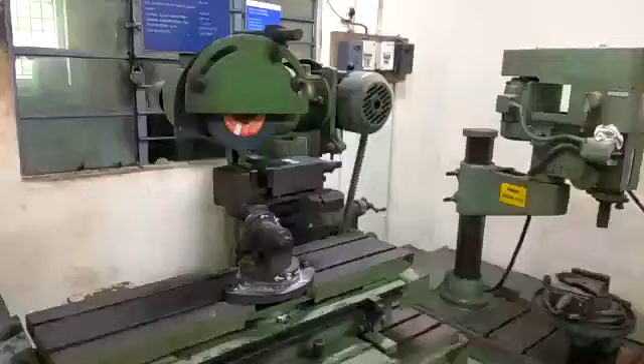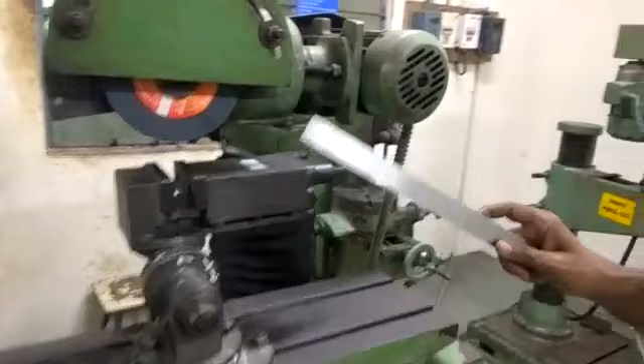Today's experiment will be on the single point cutting tool. The machine used for this is called a tool and cutter grinding machine.

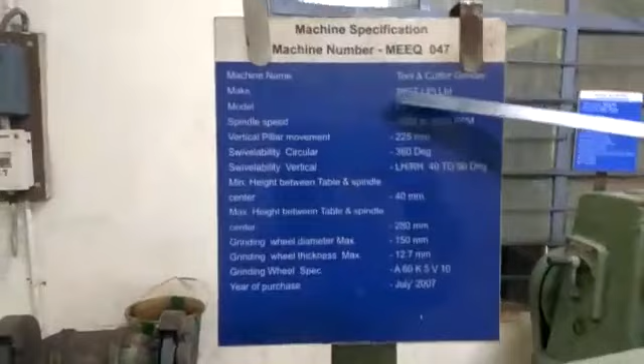See the grinding wheel machine specification. Machine name is tool and cutter grinding machine, made by SIGT Private Limited, model SG3. The grinding wheel spindle speed will be 3500 to 7000 rpm.

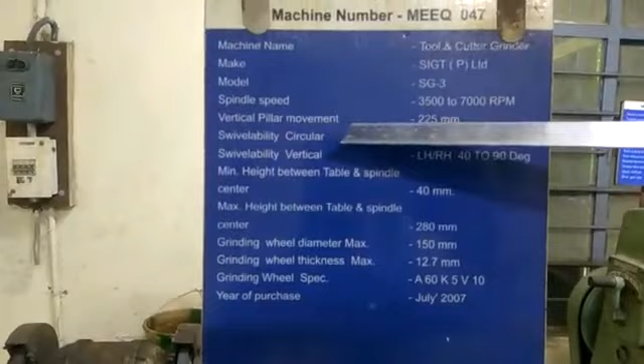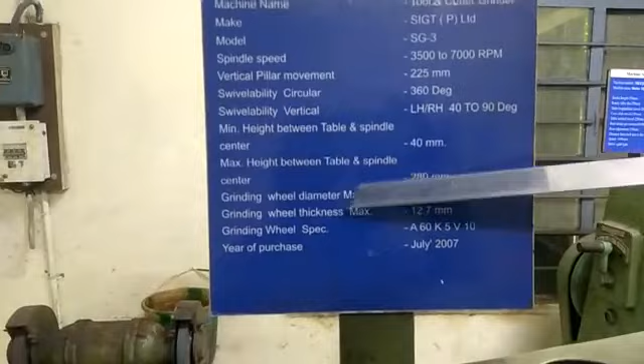Vertical pillar movement 225 mm. Swivelability circular 360 degrees. Swivelability vertical left and right end 40 to 90 degrees. Minimum height between table and spindle center 40 mm to 280 mm. Grinding wheel diameter maximum 150 mm.

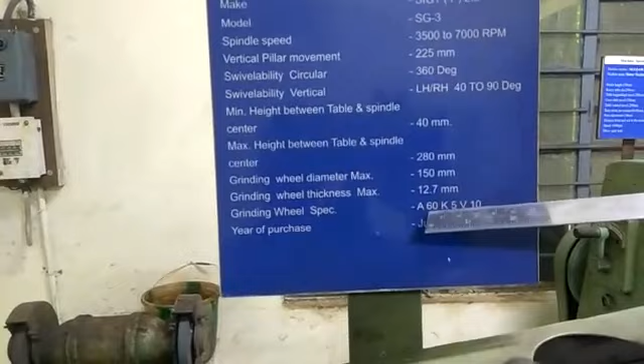Grinding wheel thickness 12.7. Grinding wheel specification A60 K5 V10: A for aluminum oxide, 60 for grain size, K for medium grade, 5 for dense structure, V for vitrified bond, 10 for manufacturing code number.

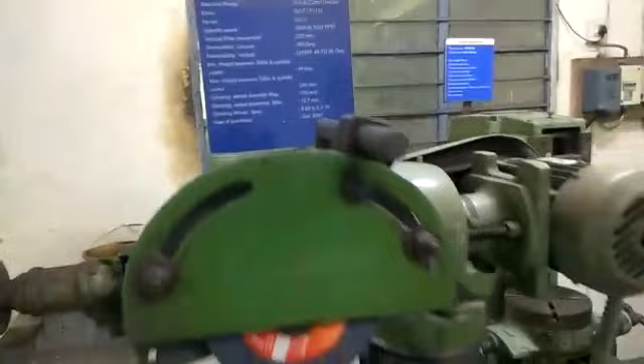Next are the parts of the tool and cutter grinding machine. This is a bed. This is a universal vise. This is the longitudinal movement. This is the crosswise movement. This is the grinding wheel.

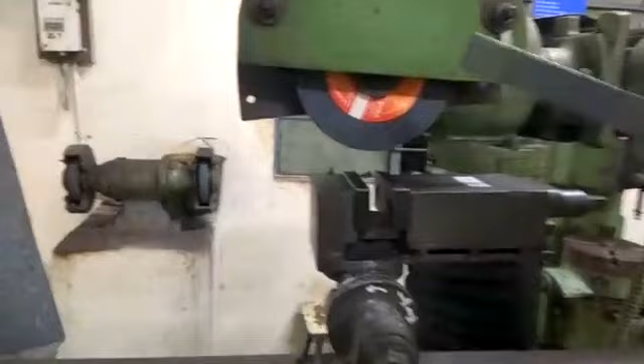The grinding material will be aluminum oxide. This is the wheel head. The wheel head will be tilting 360 degrees, left hand side and right hand side 40 to 90 degrees. This is the grinding wheel up and down movement.

This is where the depth of cut will be given. One division will be 0.01 mm, with 10 divisions given.

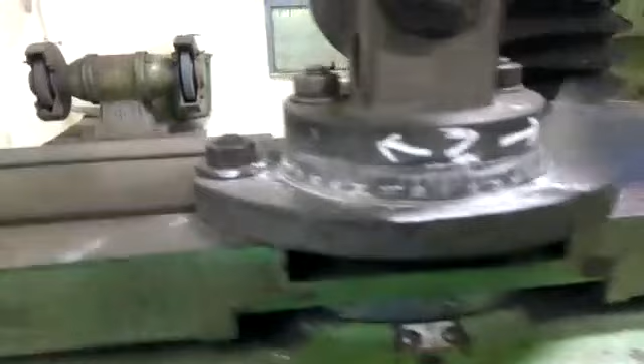Next, this is the 3 axis setup where 3 angles will be set. This is the Z axis, which will move to the ear side. This is the Y axis. The back side will be the X axis.

This is the back side. The back side will be this X axis. The ear side will be tilted.

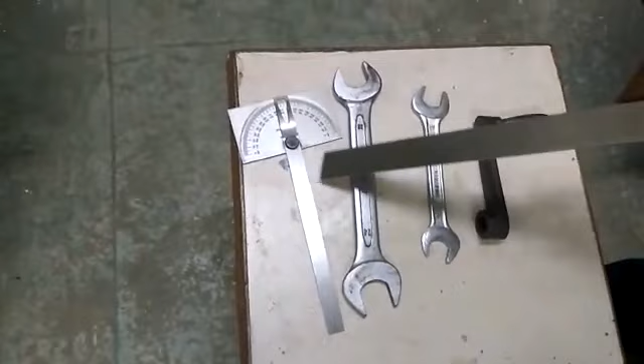Parts of the recommended tools: a 22-24 double end spanner, a 16-17 double end spanner, a bevel protractor, and a handle.

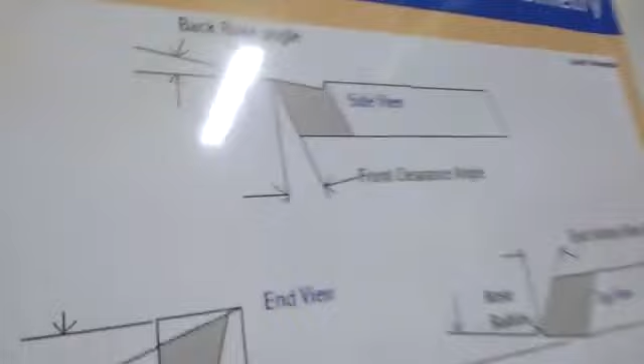Next is the single point cutting tool geometry. This is the side view showing the back rake angle. This horizontal plane will be the back rake angle, and this vertical plane will be the front clearance angle.

Next, this is the end view and this is the top view. In the top view, this horizontal plane will be the end cutting edge angle. Next, this is the nose radius, denoted by R.

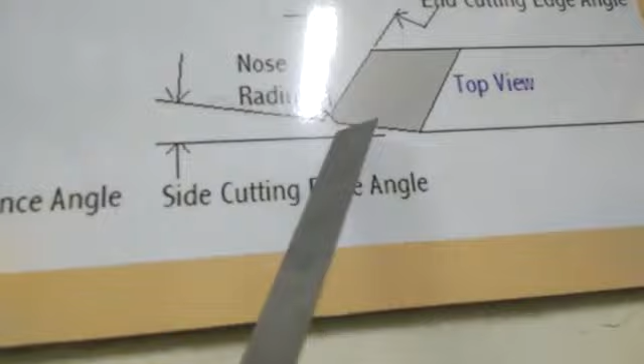This vertical plane is the side cutting edge angle. Next, this is the end view showing the rake angle. This horizontal plane will be the rake angle, and the vertical plane will be the side clearance angle.

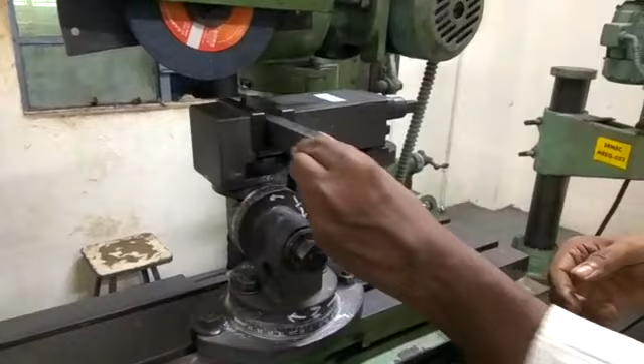Next, this is set half-inch parallel by setting your workpiece. The vise will be fixable, and your workpiece will be fixed here.

Yes sir, your workpiece will be fixed. This handle will be used to tighten your workpiece. First, set the side rake angle.

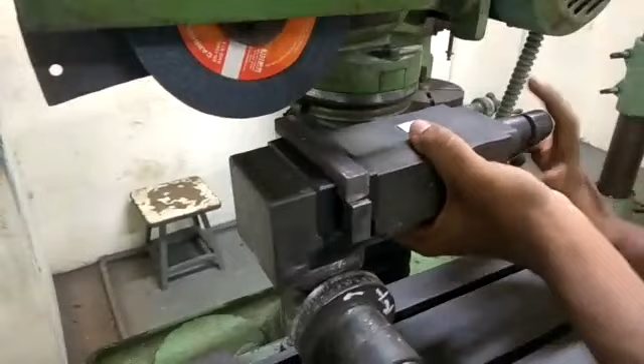For the side rake angle, this set will be set to 90 degrees. This spanner is used on this set axis, and both nuts will be used.

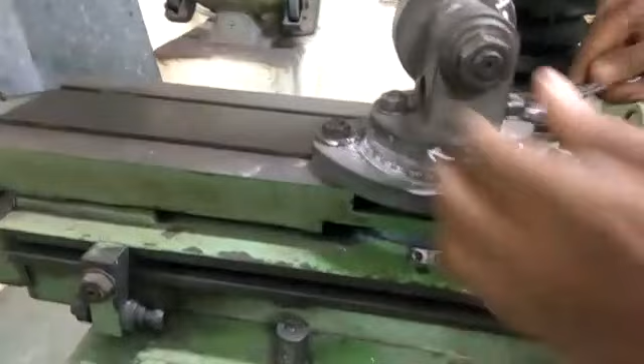This X axis will be tilted here, to the right hand side, set to 90 degrees. Z will also be set to 90 degrees for the side rake angle.

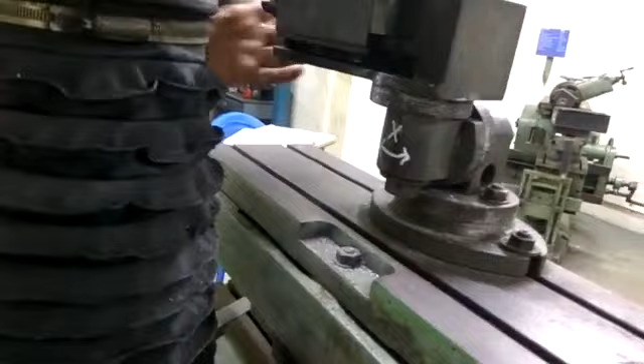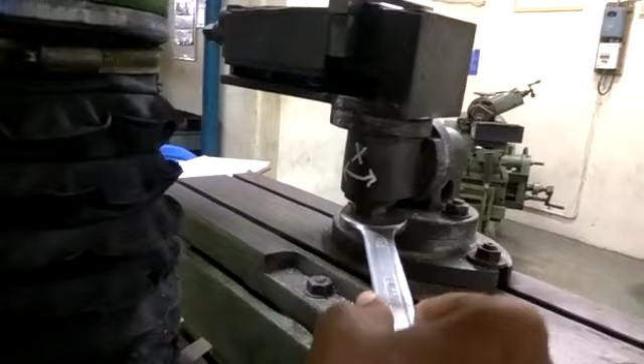Next, the Y axis will be set to 4 degrees. This is loosened, moved here, and the Y axis is set for 4 degrees on the right hand side.

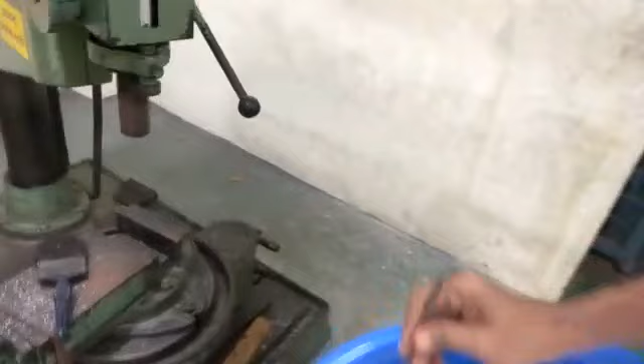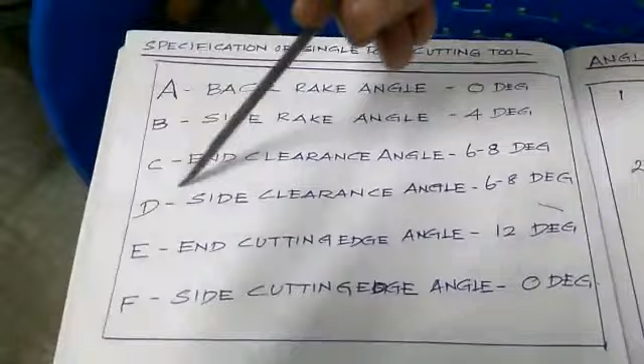This is the specification of the single point cutting tool: A for back rake angle 0 degree, B for side rake angle 4 degree, C for end clearance angle 6 to 8 degree, D for side clearance angle 6 to 8 degree, E for end cutting edge angle 12 degree, F for side cutting edge angle 0 degree.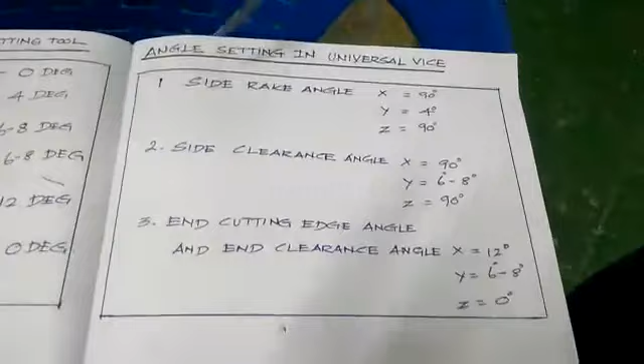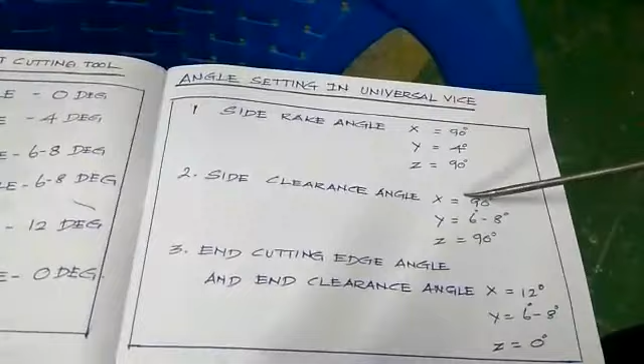This is the angle setting in the universal vise. This is the first angle for the side rake angle: x equal to 90 degrees, y equal to 4 degrees, z equal to 90 degrees. Next is the side clearance angle: x equal to 90 degrees, y equal to 6 to 8 degrees, z equal to 90 degrees.

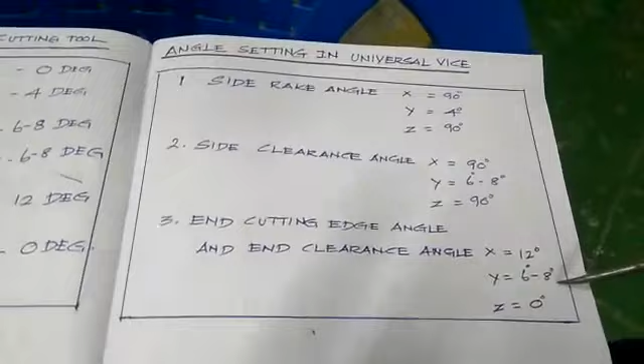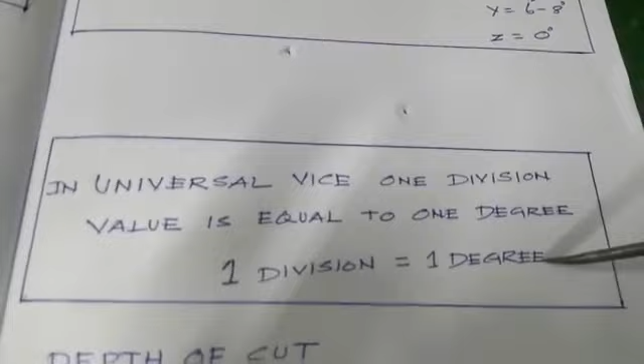Next is third angle for end cutting edge angle and end clearance angle: x equal to 12 degree, y equal to 6 to 8 degree, z equal to 0 degree. In universal vise, one division value is equal to 1 degree. Next is depth of cut: the grinding wheel head up and down movement, one division value is equal to 0.01 mm.

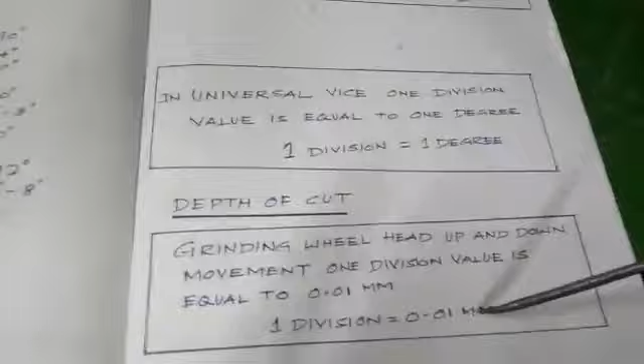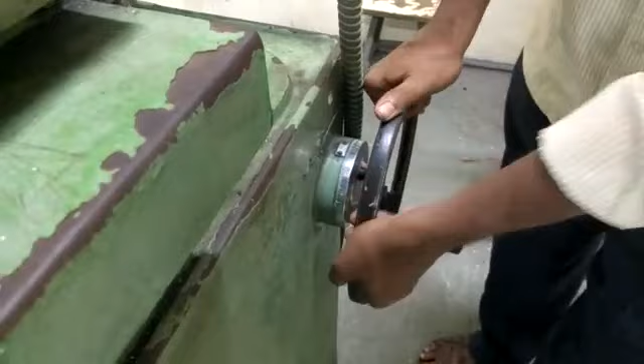Next, come to side, this is a depth of cut. One division will be rotating here, 0.01 division will be given. This is a movement up and down, the grinding wheel head will be up and down movement.

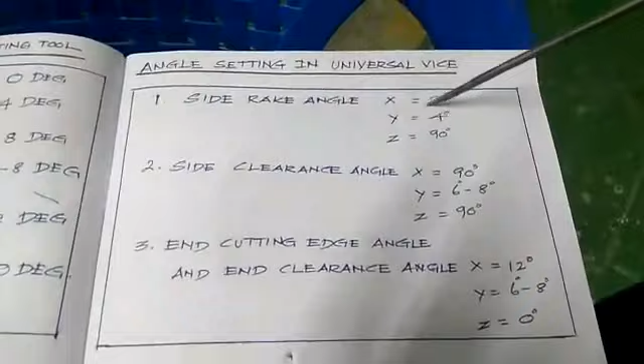Next, now first angle will be side rake angle: x 90, y 4, z 90. Come to the machine. This is z, will be 90 degree setting here. Next y will be 4 degree setting here. Next x, back side of the universal, will be 90 degree setting.

Machine start. Next, the crosswise will be moving. Next, the grinding wheel head will be down movement. Next, we are moving, this is a longitudinal movement. Next, this is a crosswise movement.

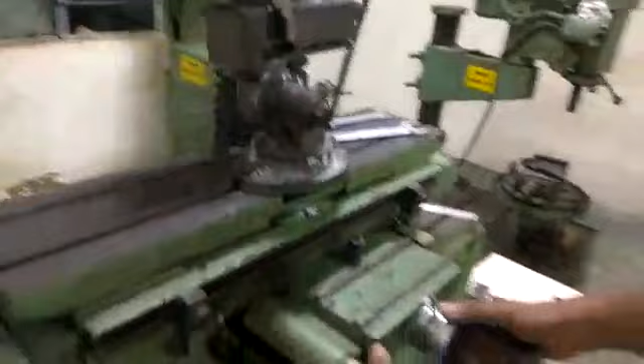Some machines only grinding will be done. Next again, your division will be given, 10 division will be given. This is a crosswise movement, at the same time longitudinal movement given.

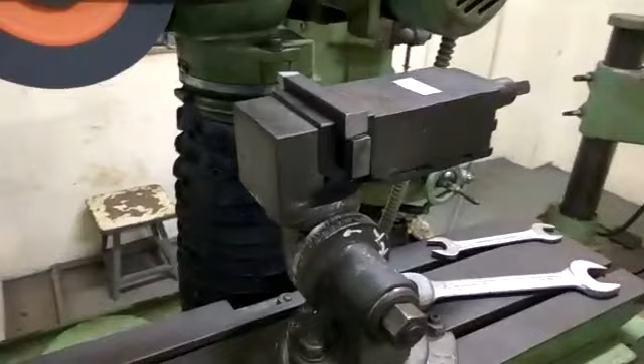Now first angle will be finished. This is a side rake angle, will be 4 degree. This is a side rake angle.

Second angle will be side clearance angle, will be setting the workpiece. Your workpiece will be fixed in universal vise. Second angle will be side clearance angle. See that here, next will be side clearance angle: x equal to 90 degree, y equal to 6 to 8 degree, z equal to 90 degree.

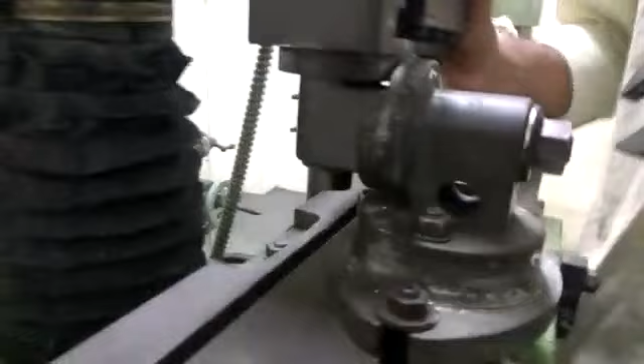Come to the machine, this is universal vise. Z will go, this z will be 90 degree left hand side. Next y will be 6 to 8 degree, that nut will be loosened, 6 to 8 degree will be setting. The other side will be 6 to 8 setting. Here will be moving, tilting, this is 6 to 8, here will be setting.

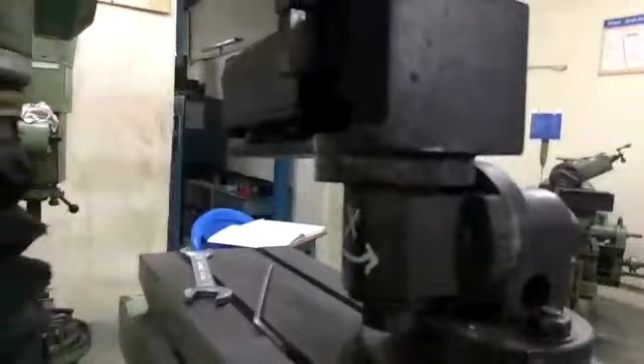Next that will be, x will be, this is 90 degree. This is x will be 90 degree, seeing here. X will be 90 degree setting. Next, machine start.

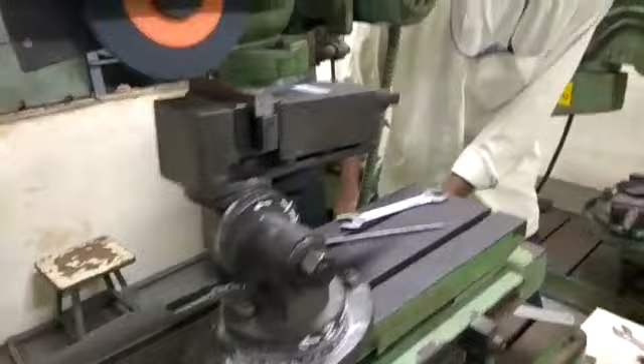The grinding wheel will be on. Next, your grinding wheel will be down movement. Start will come, next this is a longitudinal movement. Next, crosswise, this is a longitudinal crosswise. Next, the grinding wheel depth of cut will be given, 10 division will be given.

Some distance only, your grinding, your workpiece will be grinded, finishing the second angle. Now finish the second angle. This is side clearance angle, side clearance angle, this is 6 to 8 degree side will be setting, 6 to 8.

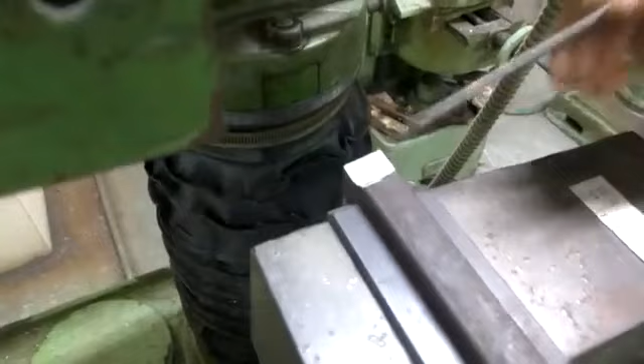Next third angle will be end cutting edge and end clearance angle. Then you stop, your workpiece will be changeable. This handle will be used to fix your workpiece. Next third angle, come to here, see.

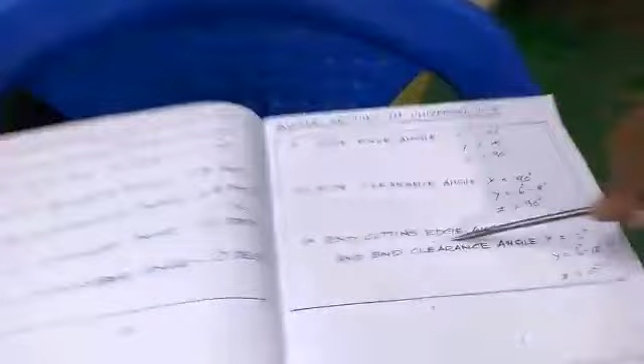Third angle will be end cutting edge angle and end clearance angle. Both angles will be setting for third: x will be 12 degree, y will be 6 to 8 degree, z will be 0 degree.

Come to the machine. See, z will be 0 degree will be setting. Z will be 0 degree setting. Yes, right, z will be 0 degree setting. Z will be 0, this nut will be used like this, it will be setting.

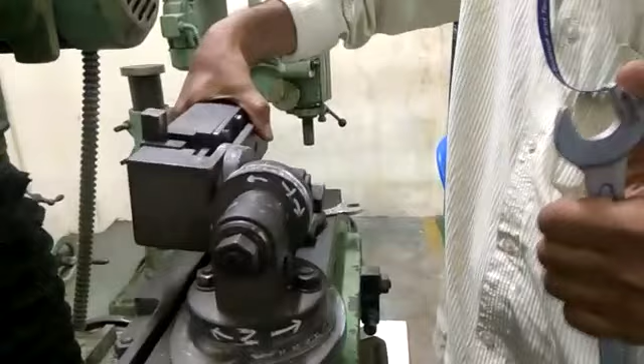Next x will be 12 degree will be setting. This is x will be 12 degree. This is front left hand side will be 12 degree setting. Next y will be 6 to 8 degree will be setting there. Y will be this 6 to 8 degree, here will be setting.

Next the grinding will be start. Next your grinding will be down movement. Next this is a longitudinal movement, this is a crosswise longitudinal crosswise. No sparkle again, the depth of cut given will be 10 division will be given, 10 division will be given.

Again, depth of cut will be given, 10 division will be given.